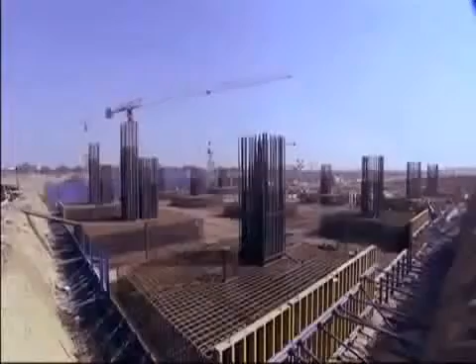A mammoth task completed against the backdrop of a looming deadline to the Commonwealth Games 2010. Thousands of workers construct India's largest post-independence building with unrelenting speed.

Technology was very much part of that system. I cannot change my specifications. I can't change the pipe. What are your deliverables at that stage?

This mega project brought in some of the brightest minds from across the world to design and build a state-of-the-art structure. Follow this team as they faced mind-numbing engineering challenges of installing a 45-acre roof and battled an unusual force.

Everybody said, no way, I can't put my name into this project, because it is a seemingly impossible task before us.

Watch this barren stretch of land on the outskirts of South Delhi, where a spectacular terminal megastructure comes to life in a record 37 months.

One of Asia's largest airport terminals, located in New Delhi. Terminal 3 is a symbol of India's emerging economic status.

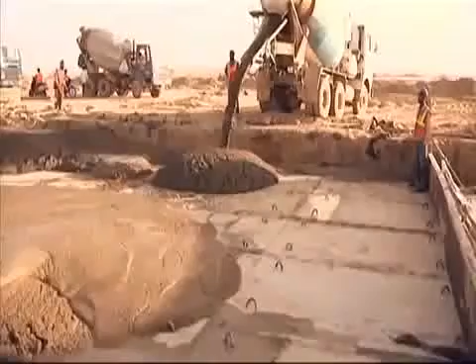On the southern outskirts of Delhi lay 300 acres of flat land, 3 times the size of the smallest country, the Vatican City. In 37 months, this is where the new terminal rose.

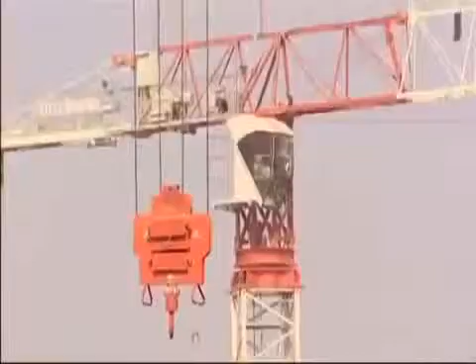On completion, it is said to be one of the largest and fastest built airports, an aerotropolis that represents modern Indian aspirations and infrastructure.

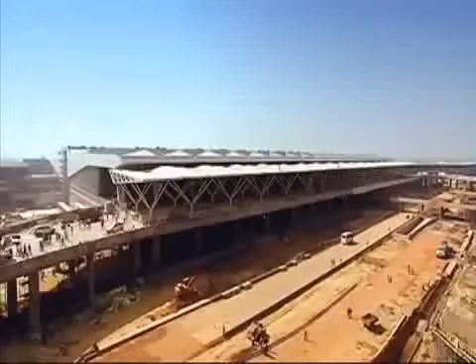In February 2004, bids were opened out by the government for the new terminal. The men behind the scenes had to be prepared for fierce competition. We prepared almost for 1 year before, and we put the best people assembled for the bidding.

I should say it is a God-given opportunity to fly the flag of GMR in the capital city of Delhi. So that is the commitment which made us win this bid.

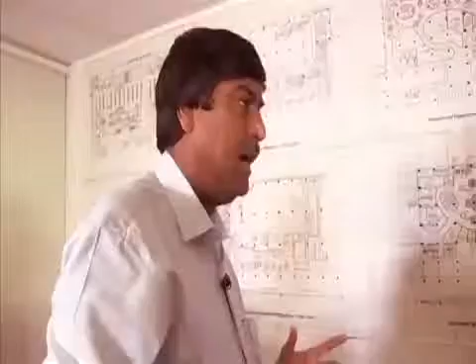January 31st, 2006, the GMR Group won the bid, but for a company that started with agriculture-based industries and had slowly moved into the infrastructure space over the past decade, getting the basics right was tougher than it seemed. GMR was new to the business of building airports, but raring to take off.

Chairman GM Rao, the man behind the vision, set out the roadmap for the project. We have taken almost 16 international consultants. And for us, at that time, spending 34 crores for bidding was a huge amount of money for me.

Heading the project was IP Rao. That's the workshop. I need, in 2-3 days' time, the whole design just to change.

An industrial engineering veteran, having worked on several power and steel projects in the past, IP Rao was the angry young man of the airport. Silent, strong and religious.

Rao's mantra was that the belief in something can make it happen. The terminal was his baby.

But he had never built an airport of this scale before. That's our major target—his biggest fear was the deadline. This week overall, what is the training shortfall here? We will definitely be falling short of the cable. 37 months to build the airport from scratch. Once it's over, I want to sign off, seal it, then we can go full-fledged.

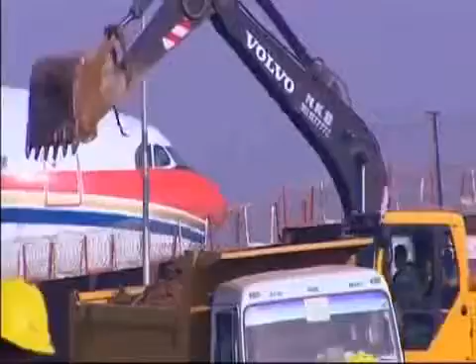Typically, construction of new terminals across the world takes over 60 months. Changi Airport's T3 in Singapore took 76 months. Beijing's T3 took 60 months, and so did Heathrow's Terminal 5—from concept to commission. T3, T4, T5.

At the very start of the project, GMR's Rao was faced with a challenge that tested his leadership. The GMR Group had bagged the country's most prestigious project, but then came a twist.

They requested us to shift the terminal from one side to another side. We had taken over the terminal which was built in the 1940s, and immediately after takeover, people were expecting that miracles would be done. There were certain parameters which they fixed that we had to change.

It was a terminal built for only about 12 million passengers, but it was already handling 16.2 million passengers by that time. It was a Herculean task, but we were able to do it. How to do that? So, gentlemen, that's the workshop.

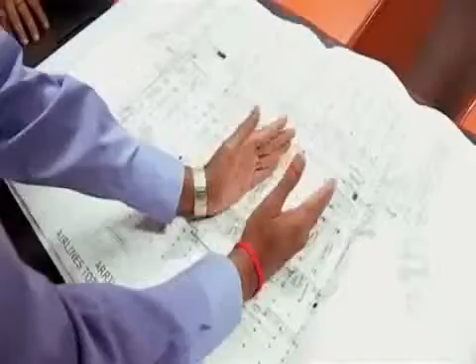It was April 2006. The master plan that GMR had presented was based on the government brief, but that had to be changed. It now had to come up at a location 180 degrees from where it was originally planned. Get more people, designers on the table, get all of you, and then sit down—I need a whole design just to change.

This had many implications. At the time of the bid, the government had proposed the terminal for 22 million passengers. But GMR conducted a study with the travel trade industry and learnt that the terminal needed a capacity of up to 34 million passengers—12 million more. Certainly not a small change.

The GMR team worked furiously on revising the master plan. The whole passenger requirement had tremendously changed—more than 1.5 times jumped—and then they had to redo the entire building and reroute the entire area. That's really given a big challenge for us.

The GMR Group studied various international airports like Dubai International Airport, Beijing Capital Airport, Seoul Incheon International Airport, London's Heathrow and Madrid's Barajas Airport to incorporate the best for Delhi's new terminal.

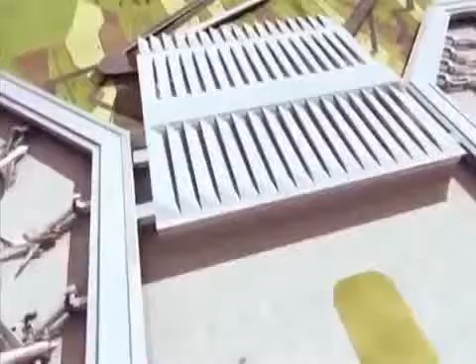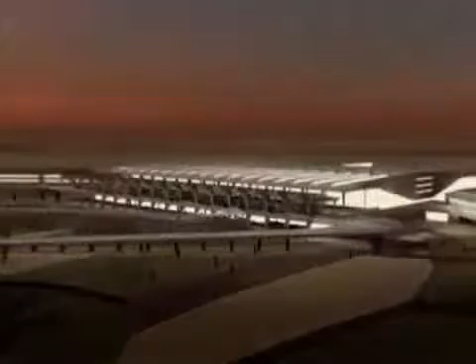Finally, in December 2006, the new plan was approved. The new passenger terminal building rises 9 levels, covers an area of 5.4 million square feet—approximately 94 football fields.

The design is futuristic, with a strong emphasis on keeping it eco-friendly. Passenger flow is natural and instinctive, either moving towards the aircraft or away from it. Below them, almost 7 kilometers of baggage conveyor belts hurtle through, making for 5 levels of high-end automated security screening. At 4.43 kilometers, the airport's runway is the longest in Asia.

Once the design parameters were fixed, construction got underway, but it was not as simple as it seemed. I should really give credit to the government that for the first time, a private airport operator was called into a National Facilitation Committee headed by the Cabinet Secretary and monitored by the Prime Minister himself. They understood our challenges, and they've been pretty helpful for us to get clearances.

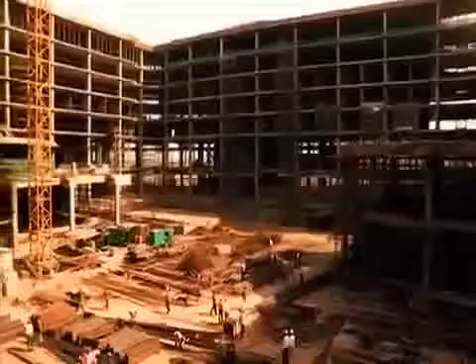At Delhi Airport, because the time was very short, we had to do planning, designing, identifying a contractor, and implementing the project all going on very parallelly.

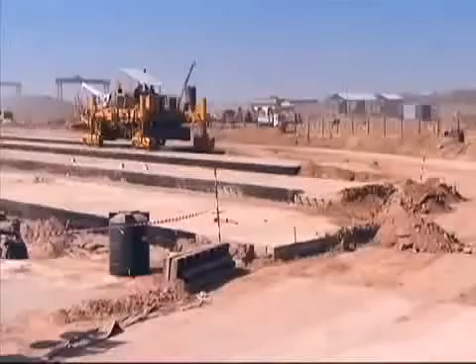Larsen & Toubro, one of India's largest construction and engineering conglomerates, took on the runway, taxiway, aprons and the terminal building. When we got into it, we had to mobilize nearly 1,000 engineers from more than 40-50 nationalities, and mobilize 30,000 workmen, along with concrete production of nearly 1,000 cubic meters per day.

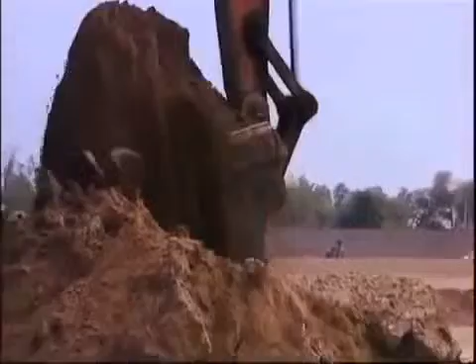At first, the land was flattened out and then the earth excavated, enough to fill a 210-kilometer long freight train. This project needed tons of steel, concrete and other building materials.

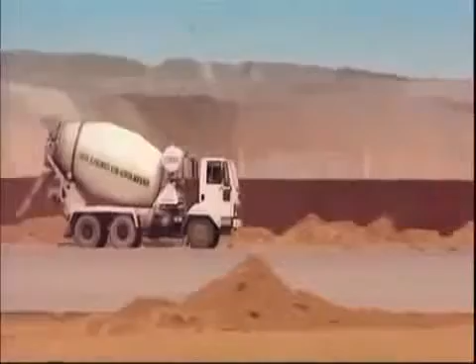Bringing it into Delhi from across state borders posed a challenge. Heavy transport trucks can come into Delhi only between 11 p.m. and 7 a.m. We used to plan with the Delhi police, sat with them. These trucks have been verified and given a separate code. So these trucks have been lined up sincerely before the Delhi outskirts.

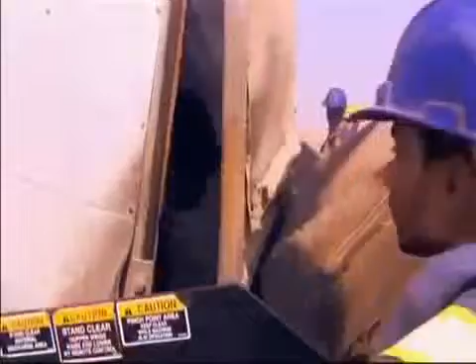To avoid disruption, it was decided to keep stocks of up to a month's requirement. The most modern and eco-friendly hot mix plant was imported from Italy and set up at site. The plant was crucial to timely completion of the runway and terminal access roads.

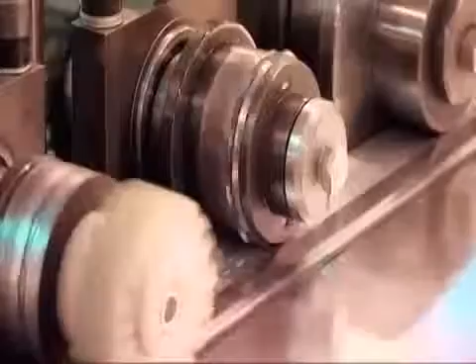Meanwhile, vendors were encouraged to move their fabrication units to the project site to cut down on logistic delays. We wanted to make sure, as much as possible, to have control of ourselves. So we bring the raw materials in and then we would shape them. Before excavation started, the site of the runway was being evaluated.

Active and animated despite his 70 years, R.C. Rekhi was the mastermind behind the plan and design of the new runway. The runway was envisioned such that the entire system could handle over 70 aircraft movements at peak hours.

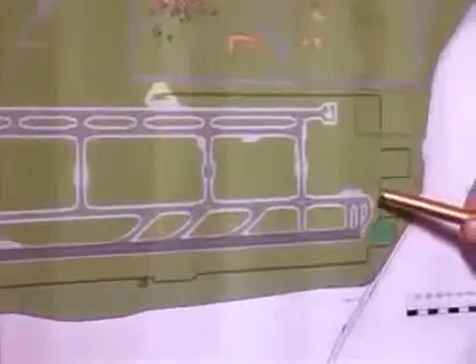But when the master plan changed, so did the direction of the runway. Now this posed a rather unique problem. The design and construction of Delhi's new runway was battling an unusual force.

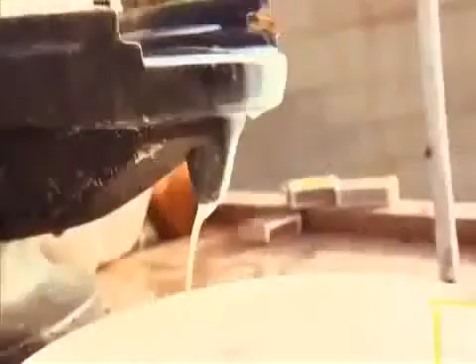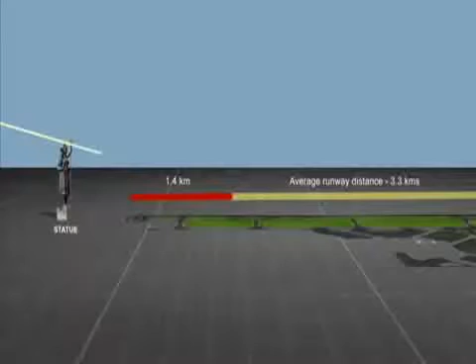Simulation showed that there was a nearly 80 feet high Hindu god Shiva statue in the flight path. Typically, incoming aircraft must clear 1.4 kilometers of runway before they can touch down. But this was not possible due to the statue and its height. This meant all flights must land almost 1.4 kilometers after the runway actually starts, forcing pilots to use full brakes and reverse thrust to slow down before the runway ran out. This was extremely dangerous and could lead to accidents. Lowering the statue or relocating it would no doubt raise religious sentiments and could take months.

Simulations are done and detailed calculations and flight paths studied. Here were the best engineering minds looking for a solution. So I asked the engineers to understand, tell me what is the way out. Sir, we have to shift by 10 degrees. If we shift by 10 degrees, the whole plan gets disturbed. So I told them, tell me, to what degree does the Shiva statue need to come out? We found 3 degrees. I fixed the runway and said go ahead. They were shocked. Sir, nowhere does this happen like this.

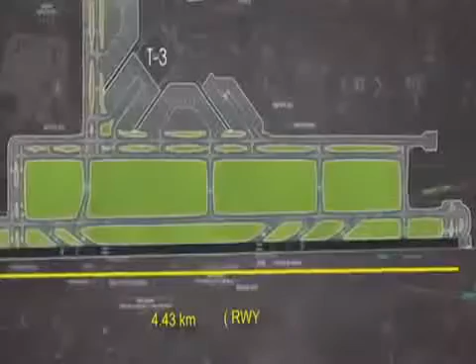At last, a solution emerged. The new runway was planned at a slant of 3 degrees from the original and was eventually extended by 1,460 meters to be compliant with air safety standards. At 4.43 kilometers, runway 11/29 is one of Asia's longest runways. This allows planes to approach and land safely.

Construction finally began. But there was another problem. The site of the new runway had been a swamp for several decades. This had grave consequences for the new runway.

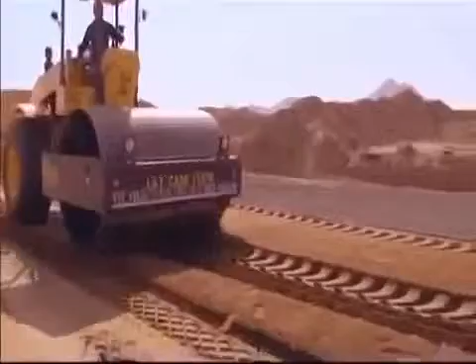This meant that the soil on the runway site had very low load-bearing capacity, not enough to take aircraft load and landing impact. Ultimately, the load imposed by the aircraft has to be transmitted to the soil only. Now if the soil has a bearing capacity which is far lower, it only means that your pavement thickness must increase correspondingly so that this load is transferred over a larger area of the soil.

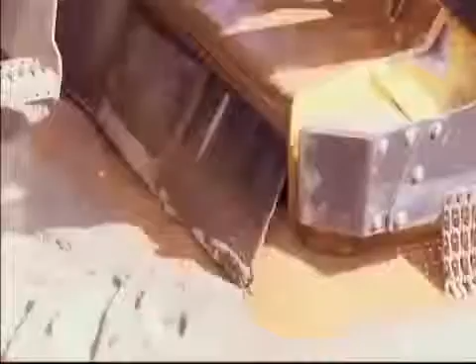The solution was to strengthen the soil by mixing it with cement and using glass grid fabric between the layers to increase the bond between them. For the first time in the country, we did this base layer with a cement-treated base. The aim was to design it for next generation aircraft like the A380s, with a takeoff weight of 550 tons.

For the terminal structure, the real challenge was to keep the design simple and construction well planned. A lot was at stake. How will all this come together without chaos and wasteful mistakes?

Meanwhile, the existing domestic airport needed urgent attention. The existing facilities were creaking under the huge increase in traffic, both of passenger and aircraft movements. The domestic terminals were designed for 12 million but were already handling 16 million passengers. Improvement works had to be carried out in a saturated terminal, so it was a stupendous task, I would say. No other airport in the world has actually gone through this kind of rigor.

GMR went on a war footing to solve this problem. We felt certainly there is an important need that we have to start a new terminal to decongest and also parallelly make it ready for T3. Terminal 1D was built to ease the pressure in the interim.

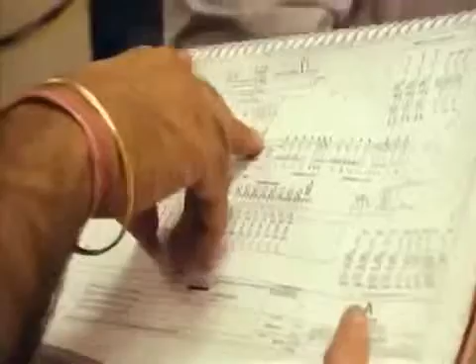Anil Dhawan, head and construction manager of T3, was a man on the move. He is athletic and passionate about fitness, whether he is on site or in office. In a military-like manner, Anil led the team that constructed the terminal.

Anil's big challenge was to assemble the roof. The expanse of the roof and the pier spread over 45 acres, and an 18,000-ton steel structure was to be installed on top of it.

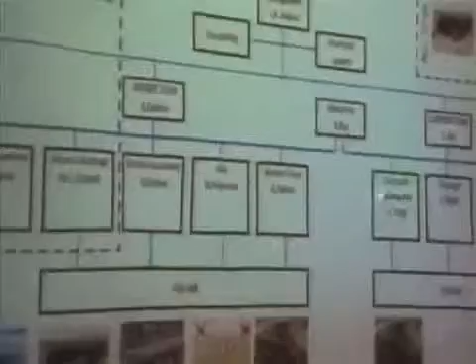The GMR team went over every engineering detail with a fine-tooth comb. Was the design sound? What kind of equipment was needed to achieve this task? What are the specifications that you would be actually... Anil needed to find answers soon.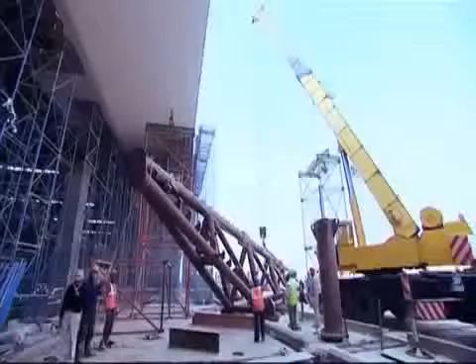Any delay in completing the roof would have cataclysmic effects on the costs. They had to cover an area of 45 acres with structural steel that was fabricated and brought in from Singapore. The critical element was the girders, which came in dimensions of 5 to 10 meters each.

For engineering purposes, the roof was divided into the land side and air side and further divided into 6 smaller units for efficient handling and placement. Each of the 6 units weighed heavier than an A380 aircraft. We allowed ourselves about 6 months to actually complete the roof from start to finish. There was no room for error.

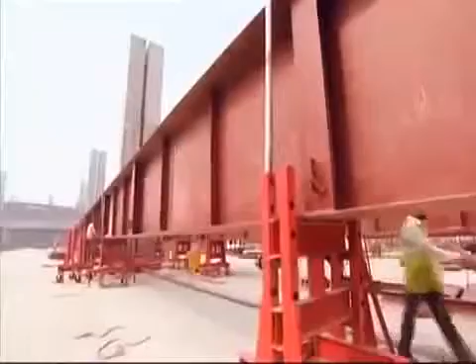Erecting the roof was a key milestone in terms of the project timeline, as it was only after this that all the other civil and technical works followed. The weather was a key factor here.

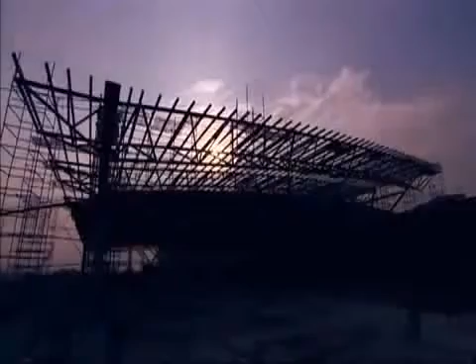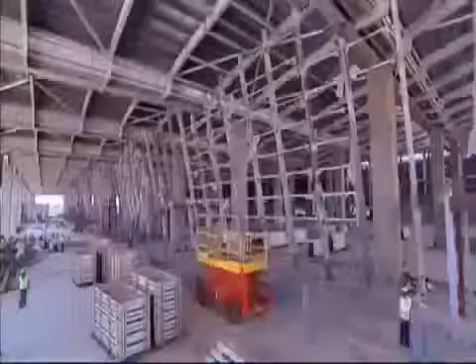Our original plan was to have the roofing installed by April of 2009. The monsoons were only 5 months away, and GMR had to finish the roof structure before the rains lashed through Delhi. Anil's team had been preparing intensely to begin fitting the roof structure, and they were now ready to start.

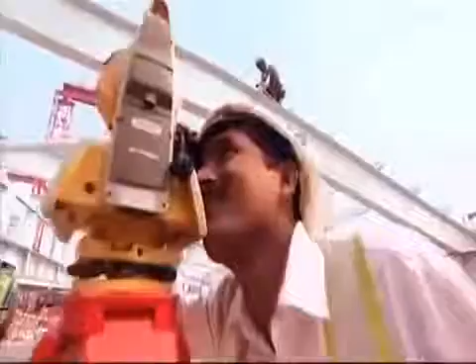Each of the units were first assembled at the 10-meter departure level, then raised 18 meters using computer-operated hydraulic jacks. Every millimeter lift had to be done in unison, its alignment checked multiple times. A minute glitch could have disastrous consequences on the project timeline.

Engineers were on edge as this sort of lift required utmost precision. Each lift took about 6 to 8 hours. But designing of the lifting system took for us 2 months, and getting the jacks required for us to get into that took another 2 months. So really, physically to start at site, 4 months of backwork we did on the table.

22 months left to go. The terminal building was rising fast.

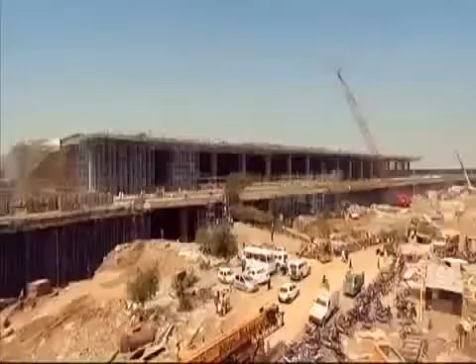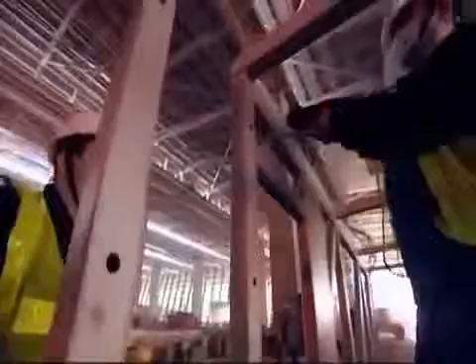Bring in efficiencies, better operation procedures, and make people's life more easier. And at the end of the day, that's what integration is about. By the time we finished, it was more than 75 systems that we started integrating together.

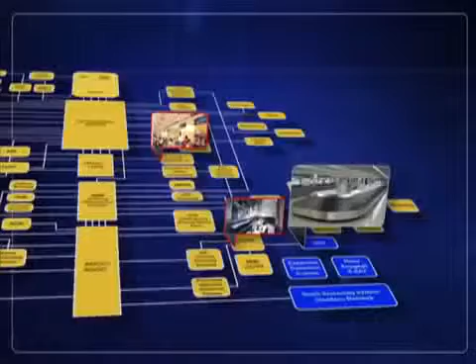If Davesh has his way, then his IT systems will connect every system in the airport, from check-in counters, baggage handling, airport screens, lighting, passenger movement systems like boarding bridges, emergency systems like the fire department, and key services like immigration. It is practically the lifeblood of the airport.

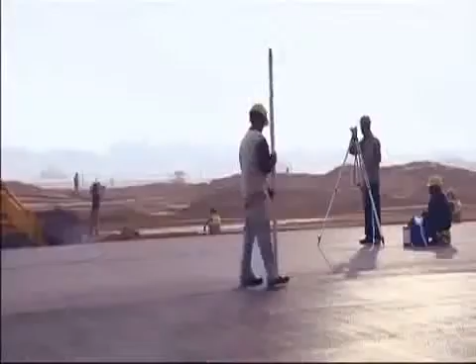The aim being to make for a faster turnaround of planes taking off and landing, and most importantly, giving the passenger a smooth experience. Meanwhile, on the runway, Rekhi and his team were on the last leg to finishing the construction. They now had the challenge of delivering a high-tech runway.

Here's the problem. There was a dense fog that settled over Delhi during winter that resulted in very poor visibility. Flights were either cancelled or delayed as they were unable to land or take off in these conditions.

To make matters worse, the runway site was close to a green belt, so the intensity of the fog was even higher around here. To counter the thick fog, it was decided that the runway was to be made Cat 3B compliant, which meant it would allow flights to land and take off even when visibility is as low as 50 meters.

An Indian origin Singaporean citizen, Roy, is a people's person, but he had no easy task. He is responsible for everything that enables movement in the terminal: travelators, passenger bays, and baggage belts. He had to set up the complicated maze of belts that would safely transport and handle 12,800 bags per hour.

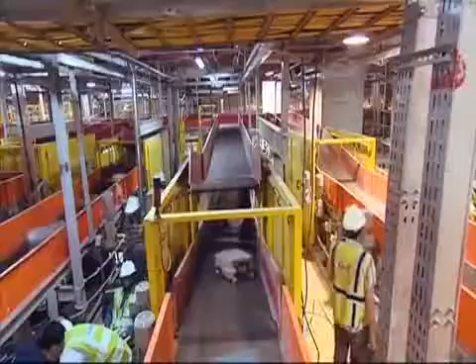The expected footfall by 2020 was projected to be over 60 million. We actually went into Changi Airport, KLIA, Hong Kong CLK, including Munich and Heathrow London. There we tried to understand what exactly the best practices they follow. The baggage handling system design was a complex one.

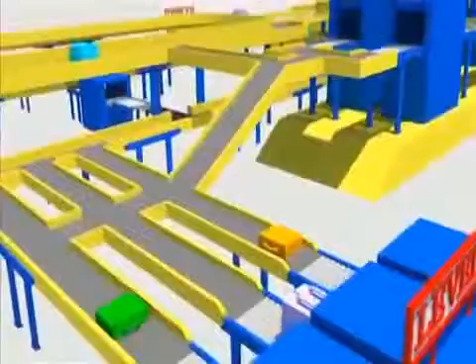Terminal 3 has a state-of-the-art complex that features the common use terminal equipment baggage handling system with explosive detection technology for greater efficiency and security.

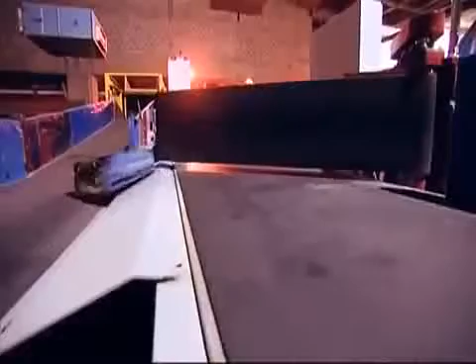Once the passenger checks in their bags, the bags go through a number of checks. At first, if a bag going through the X-ray check is found to be suspicious, it is automatically separated and diverted through another channel. If that is actually clear, the bag will go to the respective destination.

And if it's not clear, we have a team of security experts who will visualize these images and interpret their content. And if it is accepted, it will go to the respective destination.

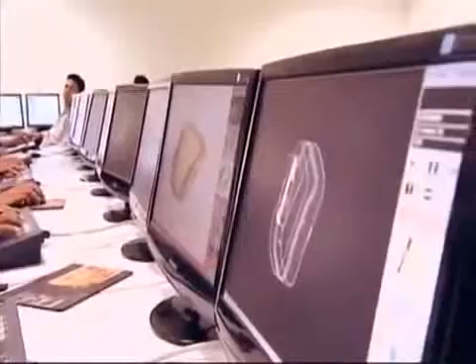And if it is rejected, it will go to the next level of screening, which is our CT screening, where it will slice the bag into 65 different pieces, inspect and take a decision. Where if it is rejected again, it will go to a team of experts who again review those images. From there, accepted bags will go to the destination, rejected bags will go into level 4 screening area.

Work on the baggage handling system began and the key contract was awarded to Siemens.

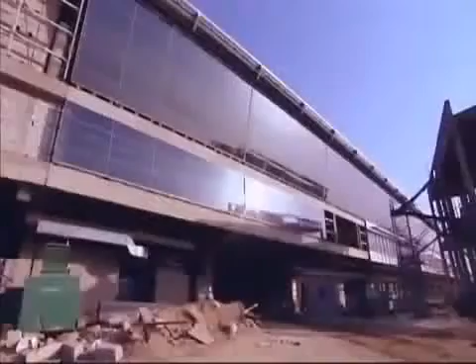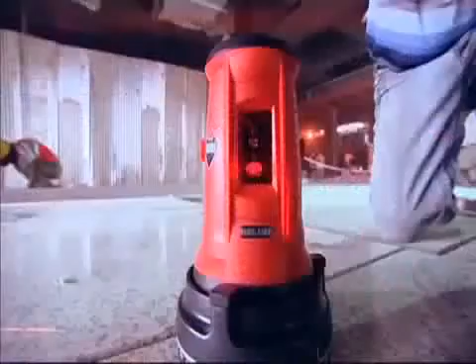In other parts of the terminal, glass was being fitted. Flooring was simultaneously being laid and was closely supervised, checking the level after each step. Laser-guided measurement tools were used to ensure that over 100,000 square meters of granite tiles imported from Brazil were properly aligned.

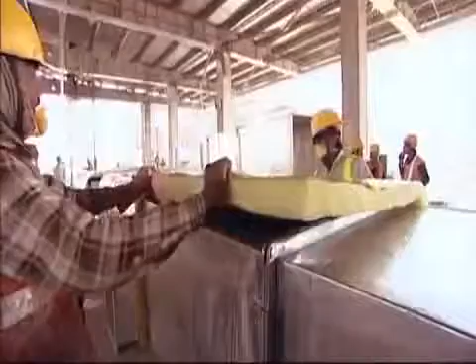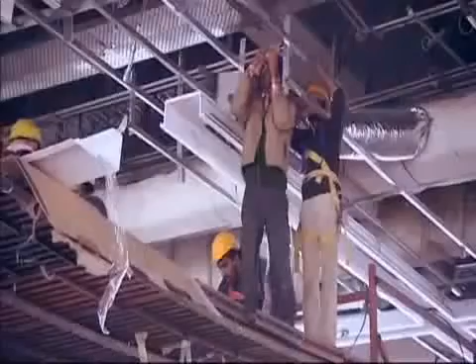With multiple vendors at work, clashes broke out. It threatened to upset the schedule, result in cost overruns and engineering nightmares.

So in September 2008, GMR brought in BIM, the 3D Building Information Modeling software. You fed in all information and technical specifications of each aspect - power, baggage handling, IT and security - and it simulated conflict areas, programmed the flow of work and resources required.

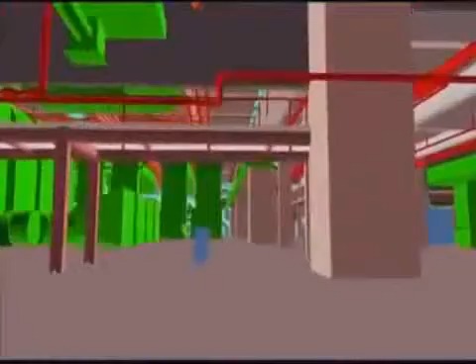This stage of construction was the most pressured. I think this was probably the first project to have employed that, and to have actually developed a 3D model where all the obstructions were looked at and cleared prior to installation. We saved cost, we saved time, and we were able to produce a quality product.

Sujit Nag had an added brief to ensure that the airport was environment friendly and LEED certified. Temperatures in Delhi range from 5 degrees in winter to an extreme almost 45 degrees in summer. All the glass meant higher power usage to keep the area cool and comfortable for passengers. It was a tricky balance of maintaining good lighting conditions and keeping the heat out.

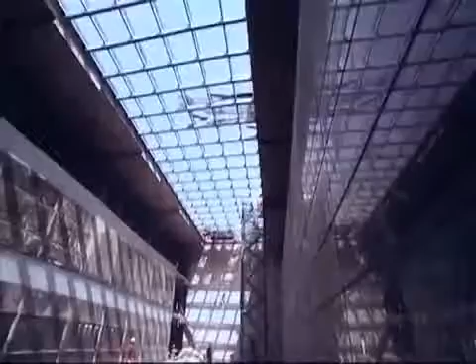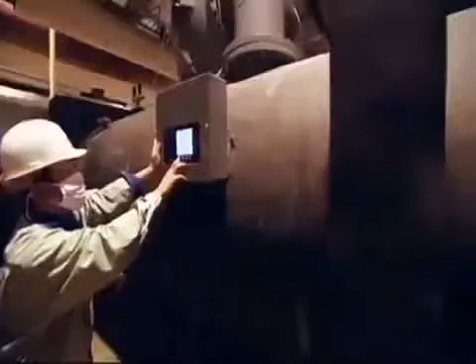The roof was designed with slits to take advantage of and use natural light. A central monitoring system, CMS, is used to control automatic sensors that detect day and night times and sets temperature and light accordingly to use the least energy.

We are the first airport that we achieved - no other airport in the world has got a green building certification in gold category.

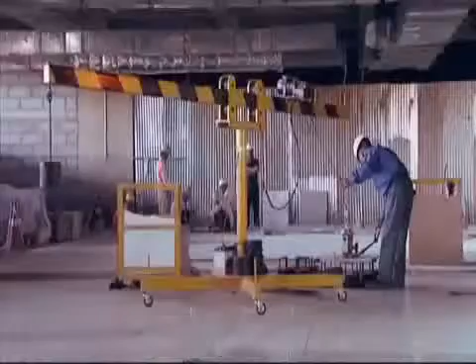It's action stations at all ends and the deadline is crushingly close. Will everything come together in time?

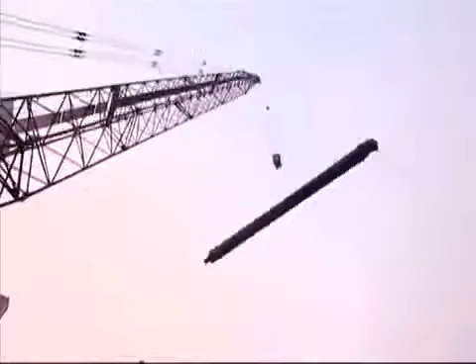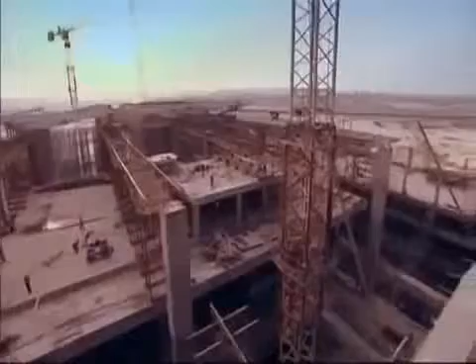Meanwhile, Anil was racing against time to finish the roof before the monsoons arrived. On the air side, GMR adopted the pull method to install the roof. Cranes carried the massive structural steel girders to the top of the tower, where each section was assembled and pulled to an intermediary level. Finally, with 4 massive horizontal pulls, the roof layout was completed. Week after week, 18,000 metric tons of structural steel was fabricated, assembled and raised.

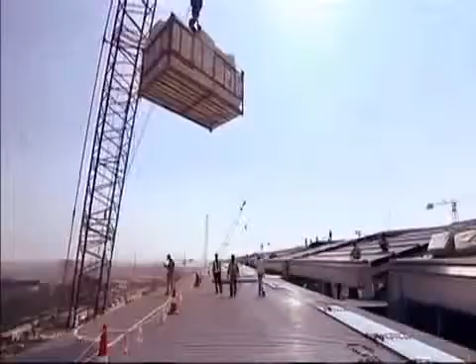The roof of the terminal and the pier spread over 1.3 million square meters. The 7-layer sheeting system was designed to provide the highest degree of insulation and sound deadening. Finally, the roof was covered and completed. It was a key milestone.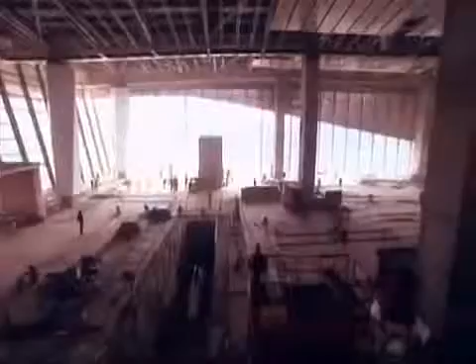Engineers and vendors already at work on site redoubled their efforts, now adding all the elements that turned what is said to be India's largest post-independence public building into its most prestigious airport. Suspended from the roof were a number of essential services like the air conditioning, fire prevention sprinklers and lighting fixtures. All these had to be in place before the false ceiling hid them away from the view of the visitors.

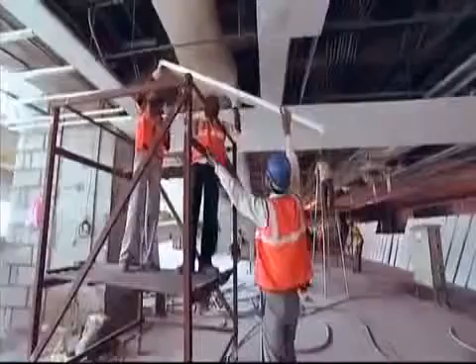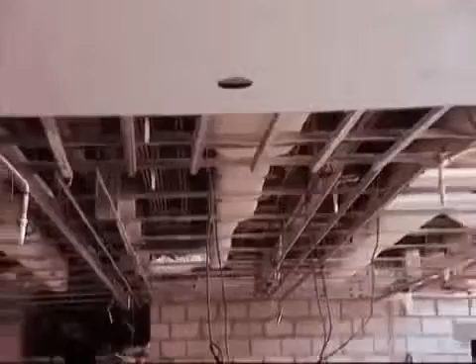For the ceiling, L&T was called in. The false ceiling contractor got into the job and then realized that there's such a massive area that all the false ceiling people in India put together could not manage this. So we had to train our own people, get them inside.

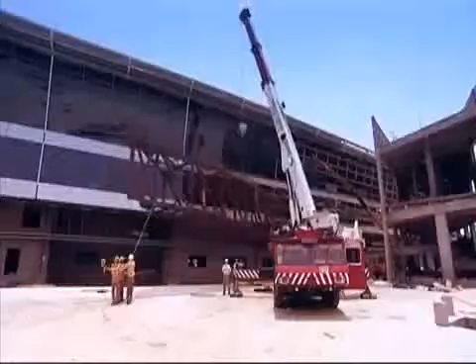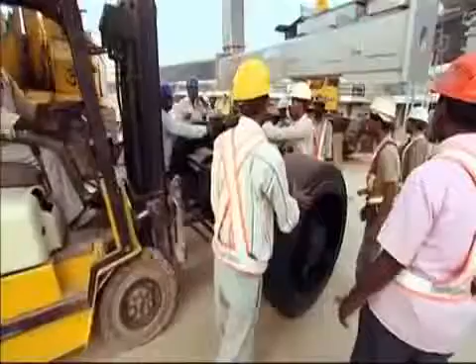On the air side, a complex set of processes were at play. Roy oversaw the installation of the passenger boarding bridges. These were manufactured in China and Japan and transported to the project site in Delhi. They are delicate units that fit into the aircraft door at one end and at the terminal on the other. Any damage to the units would render them useless or dangerous to install.

July 2009, Roy and his team were tracking progress. Then one night, he received a call. 2 of the trucks transporting the delicate passenger bridges had overturned in an accident. The bays were badly damaged.

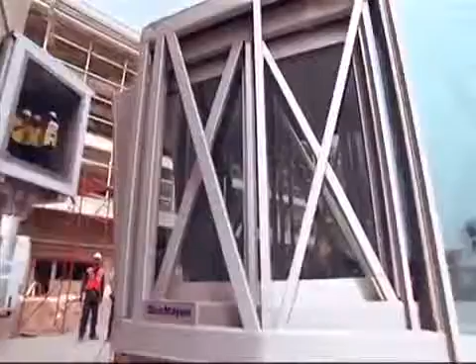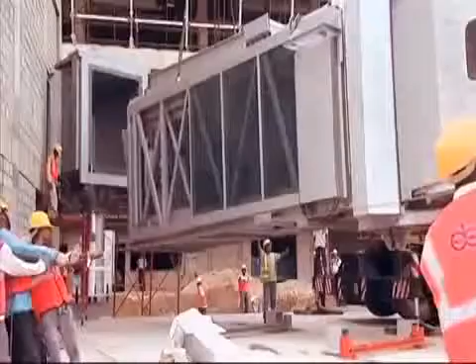With just 8 months to go, it was impossible to manufacture new units. Roy had to come up with some other solution. We tried to actually recover these 2 units, but it was not possible because of misalignment. And we, together with the factory team members, sat together and diverted 2 bridges which were actually meant for other airports, converted them with our dimensions and transported back on a timely basis.

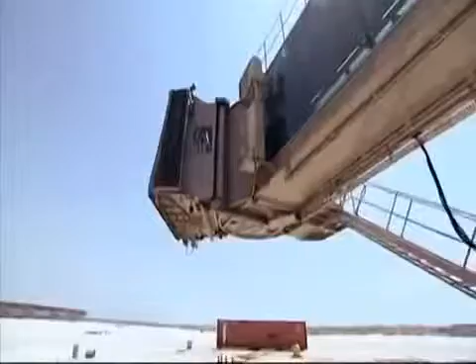Roy and his team started installing the bays. It took 6 hours to install each one, and there were 78 bays to be installed.

It was high alert on all fronts. All departments were working furiously 24/7 to complete construction, fittings and interiors. In about 180 days, starting January 2010, all systems were to be put to test in a 24-week drill, the Operational Readiness and Airport Transfer, or ORAT.

We engaged Munich Airport, who have successfully done ORAT in a number of airports, including Bangkok, including Hyderabad. And we engaged them because they have a lot of experience. But very importantly, we had a team built around them so that that experience and that knowledge could be transferred to our team.

Were construction and systems ready on time? Did they pass the tests Harrison put them through? You are professionals, act as professionals.

Finally, the ORAT, which is a test run of live airport scenarios, begins. For 6 months, 56 trial drills using 50,000 mock passengers were conducted to test all systems and processes, each one a little tougher than the one before.

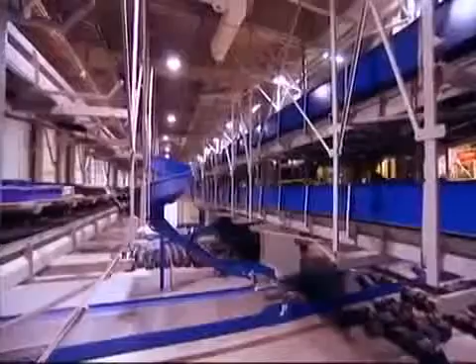Here is one scenario. The baggage handling system had to be tested with over 27,000 dummy bags and identification tags created for 36 flights. All check-in bags had to be tagged with a code to enable automated identification so the bags could be sorted and loaded into the respective airlines without glitches. Any error could hinder the check-in and boarding process and result in flight delays.

GMR had to make sure airport staff were fully prepared to operate the complex 5-level automated baggage system, and this needed meticulous planning. It was painstaking and exhausting, but had to be done. There are also a number of systems like check-in counters and flight schedules that had to work together seamlessly.

Our difficulty is the airline back office connectivity, that the airlines cannot connect to the back office.

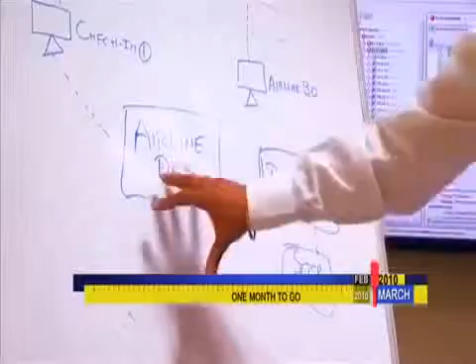But all was not well with the terminal's IT system. February 2010, Davesh was suddenly close to breaking point. Problem is ORAT has started. Okay, so we're starting the...

With merely a month left for completion and a couple of months before opening day, he realized that the IT network design for the airline back office system did not meet the requirement of the airlines.

So that would mean that we cannot open the airport up. Or if we open the airport up, the airlines cannot do the back office functionality. And that would cause huge grief to the airlines and ground handlers. So at that point, we thought that if we don't get this right, then I think we're going to have an issue with the airport operation.

Managing people was equally tough. One big challenge for Andrew was changing the mindsets of the workers and training them to use the new technology.

Opening was now just a month away. The operations control room under Andrew was monitoring every square inch of the airport, with over 3,000 surveillance cameras rolling 24/7.

The artwork and finishes team was also on overdrive, overseeing installation of elements that gave Terminal 3 its character.

Project head IP Rao was on one of his many rounds of inspection. Before he gave the thumbs up for opening day, he had to ensure all bottlenecks were cleared and there were minimal teething problems.

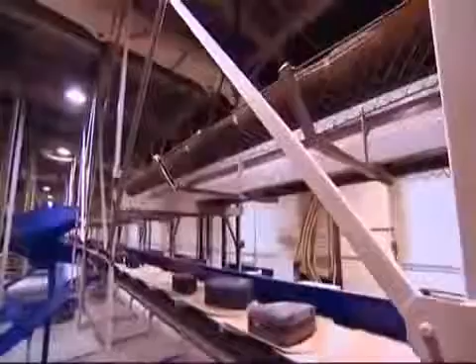Down below, the baggage conveyor belts swiftly rolled into action. Out on the apron, the fire tenders and refueling vehicles fell into place.

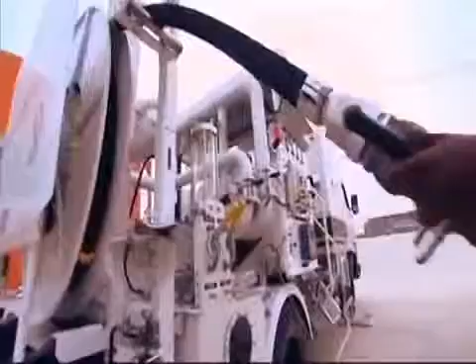The first commercial flight docked at Terminal 3, bringing in travelers who marveled at this first-of-a-kind structure in India.

I'm actually stunned. I love it. I'm really glad that we've managed to do this. And it's definitely one of the better airports I've been to.

After 37 high-pressure months for the GMR-led team, T3 in New Delhi is now a visible symbol of New India and her new economy. We are very happy that we are also meeting the same standard as other airports internationally. Whenever we used to come here, it was always a bit of a disappointment, but now I think we have come over that, and we are very, very proud.